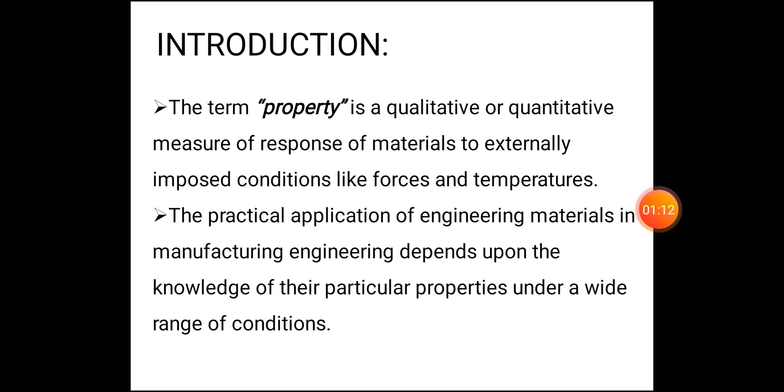The second point is that the practical application of engineering materials in manufacturing depends upon knowledge of their particular properties under a wide range of conditions. So before manufacturing any product, without knowing the property of materials, we can't use them. That is point number 2.

What are the classifications of material property? There are 4 classifications of material property: chemical property, physical property, mechanical property, and dimensional property.

Chemical property refers to the chemical reactions of material. Physical properties include density, Poisson ratio, conductivity, and so on. Mechanical properties include strength, toughness, stiffness, and so on. Dimensional property means the changes in size, shape, etc.

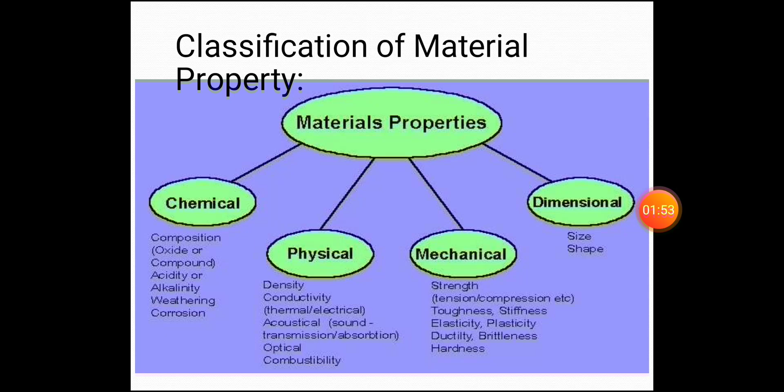Here we will discuss mechanical properties. What is meant by mechanical property? Mechanical property describes the behavior of material subjected to external force. When we apply some external force to the material, how it behaves is the mechanical property.

The mechanical property of materials provides the basis for predicting the behavior of materials under different load conditions and designing components out of them. Before designing any product, we apply different forces and check how the behavior of the material changes, and that gets notified.

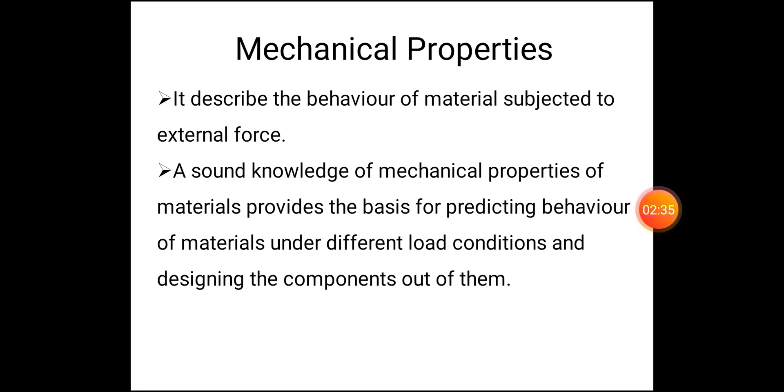Next, classification of material property: strength, elasticity, plasticity, ductility, malleability, stiffness, toughness, hardness and fatigue. These are the major classifications of the mechanical property of material.

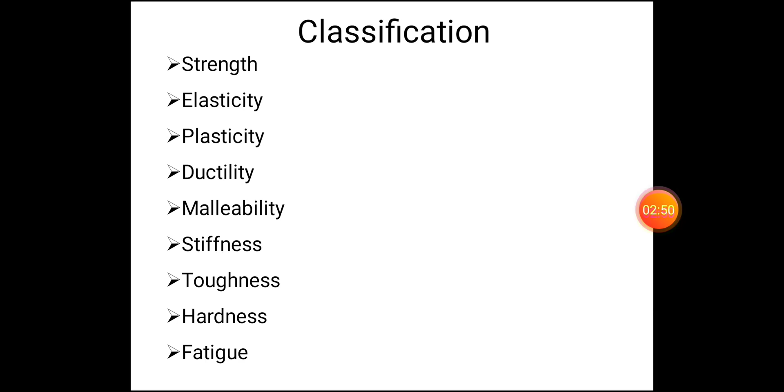First, strength. Strength is the ability of material to withstand load. For example, steel and RCC structures - steel structure and RCC structure. RCC is nothing but reinforced cement concrete.

See figure number 1: there are 2 humans pulling one material, it may be equal force or unequal force depending on the humans, so that material withstands the load of those humans. In the next figure, there is an animation of one man jumping on the structure or material, and the material should withstand the load. This is strength.

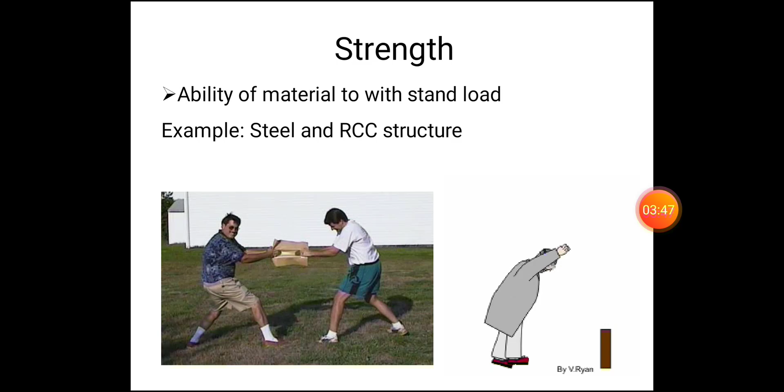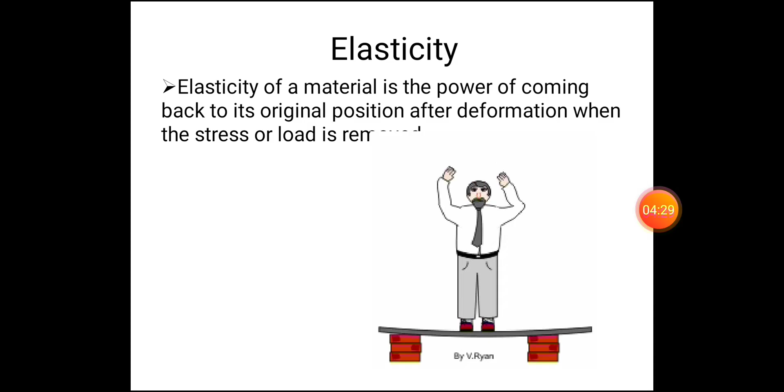Next, elasticity. Elasticity is the power of coming back to its original position after deforming when the stress or load is removed. Looking at the figure makes it easy to understand: there is a human jumping on the material, the material will deflect, and after the human comes up, the material returns to its original position. When he comes down again, it goes down. So after removal of the load, the material comes back to its original state. That is elasticity.

A better example for elasticity and plasticity: all of you know about a rubber band. When we apply or pull the rubber band with some particular force, and when we release the force or load, it comes back to its original position - this is elasticity. When you give continuous load, continuous pulling, after some particular load it will break and cannot come back to its original shape - this is known as plasticity, and the length of the rubber band also increases. This is plasticity, explained for better understanding purposes only.

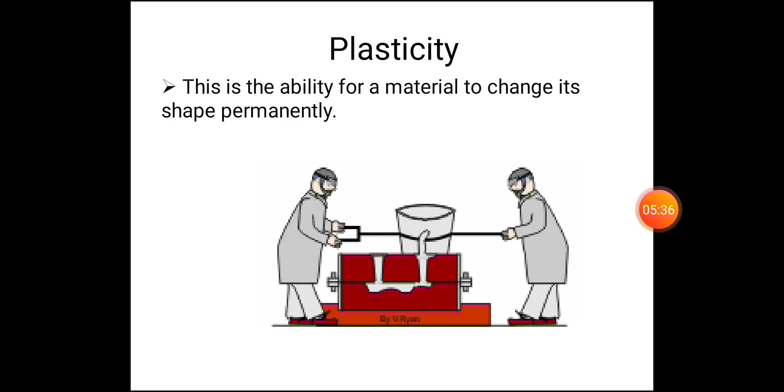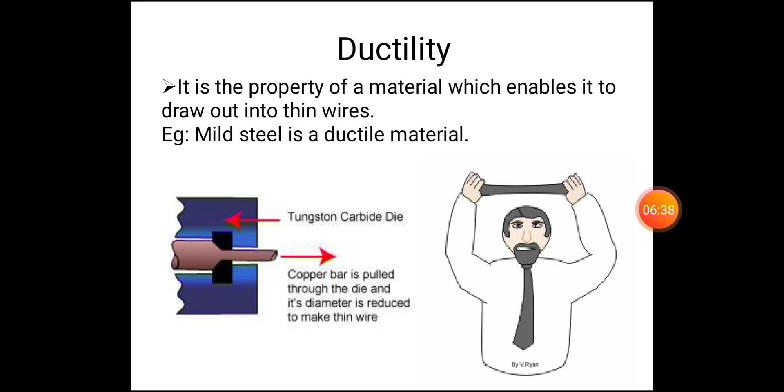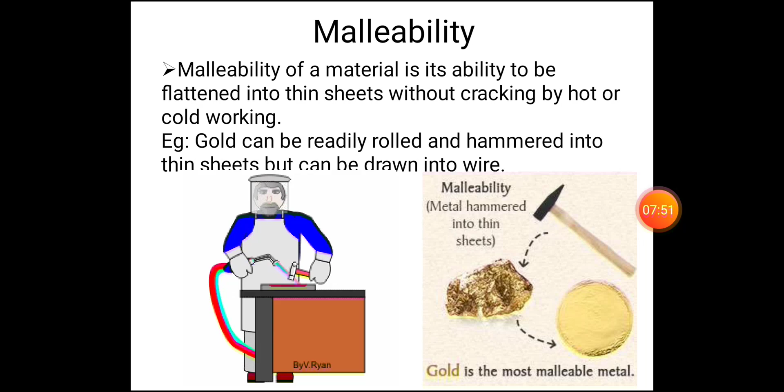Another best example, for easy understanding, is wheat atta used to make chapati. A round ball of wheat atta is rolled by a chapati making machine or roller, and it becomes like a thin sheet. I am saying this example just for understanding purposes of malleability.

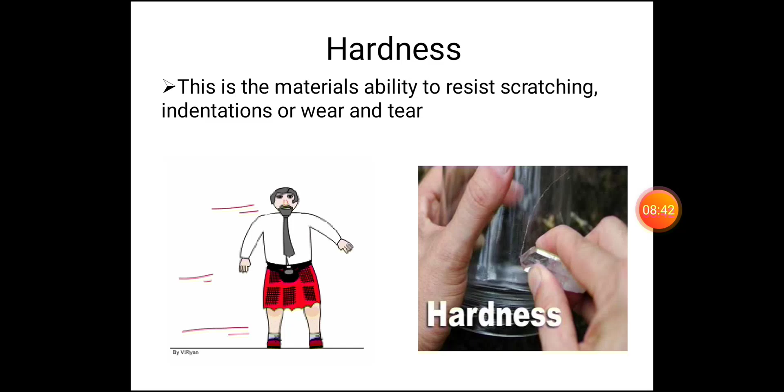For a better example, not an exact one but for understanding purposes: if you take a biscuit and apply load, it breaks. This is the best example for brittleness. Brittle material examples are glass and cast iron. If you drop glass from a particular height, it will break.

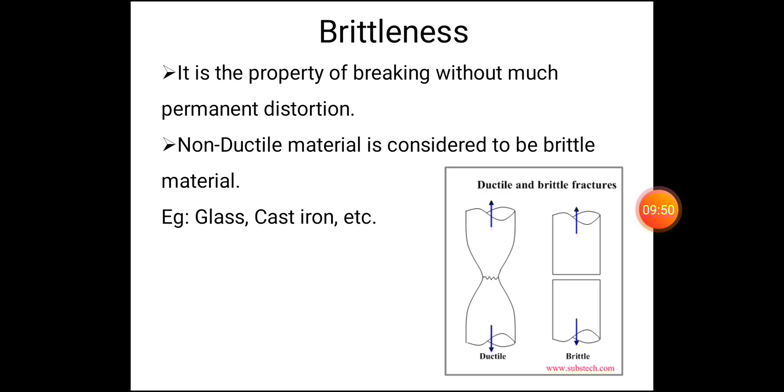Next, stiffness. It is the ability of a material to resist deformation. So when you apply load, it cannot change its size and shape; this is known as stiffness. For example, steel spring or spring steel.

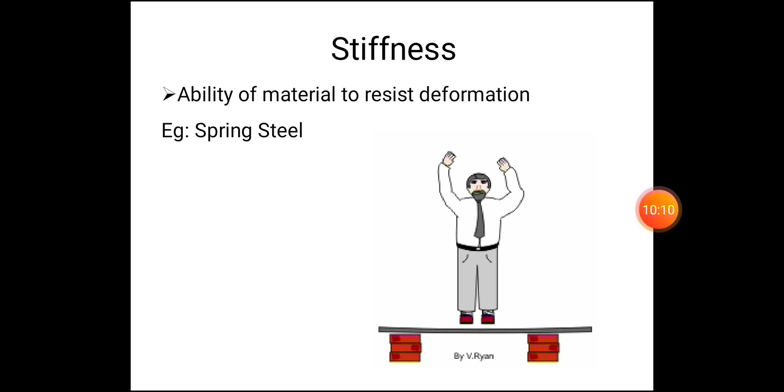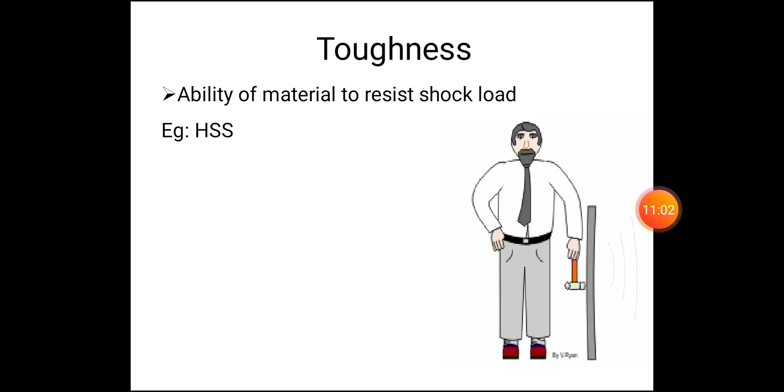For example, high speed steel. High speed steel is mostly used for making tools, for machine tool purposes. When we use the tool for machining, we give a depth of cut of 1mm, 2mm, 3mm. So toughness material is mainly used for manufacturing tools.

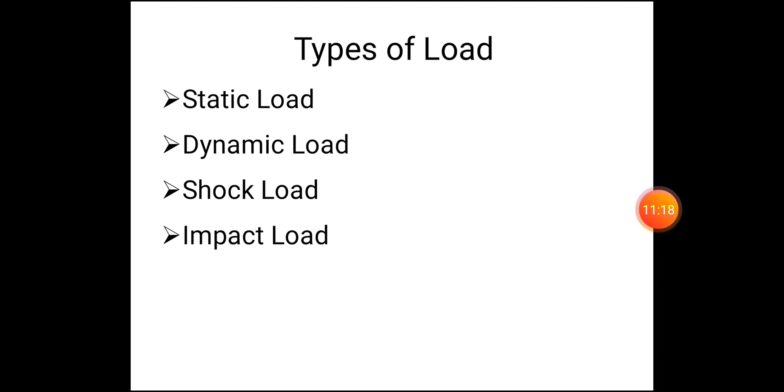So, types of load. There are 4 types of load based on mechanical property: static load, dynamic load, shock load, and impact load.

Static load: the load value does not change with respect to time, known as static load. For example, machine weight. When we keep a machine at a particular floor, there is no change in the machine's weight with respect to time. The machine weight will be a common example.

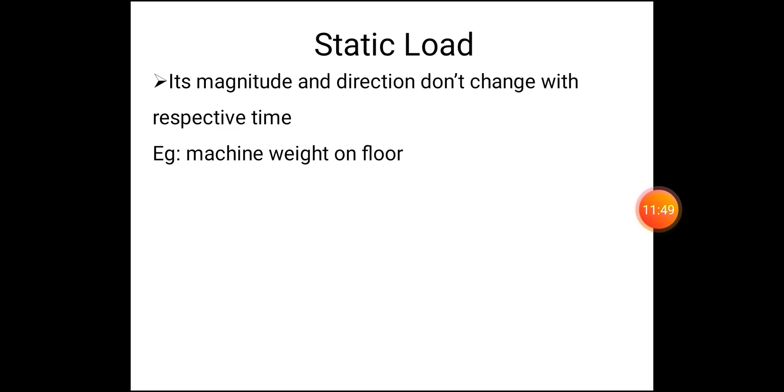Next, dynamic load. Dynamic load changes with respect to time. For example, cutting force, when we give depth of cut to the tool, the force may vary depending on the human being and time. The human may be tired, so it will give slow force, or the human may be very active, giving rapid and randomly high force.

This is not an exact example, I am saying it for understanding purpose. Two men are running on the ground, starting for 10 rounds. First 5 rounds he will go very fast. After that, for each round the speed will decrease randomly or with respect to time. This is another example for dynamic load.

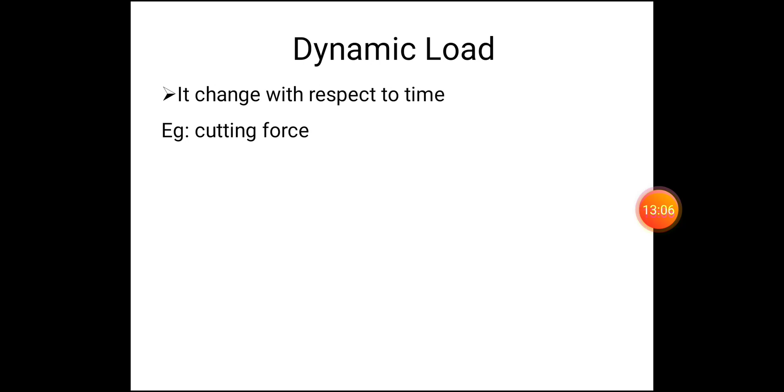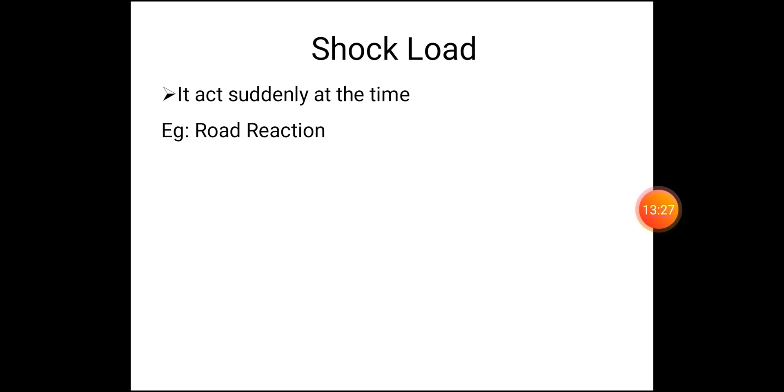Next, shock load. Shock load acts suddenly at a time. For a better example, during car driving, when we apply brake, there is a load and reaction between tire and road. This is a shock load during brake apply.

Next, impact load. Impact load is also one type of suddenly applied load, and it acts with some velocity. For example, a hammer blow is applied suddenly with some velocity. It is known as impact load.

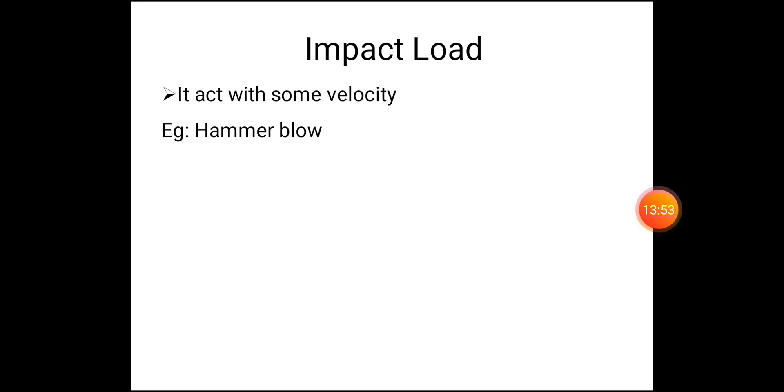Next, force. Force is nothing but F equals ma, the product of mass into acceleration. See the figure: there is a human foot that will hit the rubber ball. The rubber ball will move with some speed in a particular direction. The load or force is given by the foot, the rubber ball is the mass, and the mass of the ball moving with some velocity at a particular angle is the acceleration.

Another example: all of you know the cow. When we beat the cow, for example maybe a person X or Y beats the cow, what is the sound of the cow after being beaten? Ma, it gives a sound 'ma' - M-A. So the human beat is the force, the cow is the mass, and because of that beat, the cow moves some direction with some distance, which is the acceleration. This is for understanding purpose.

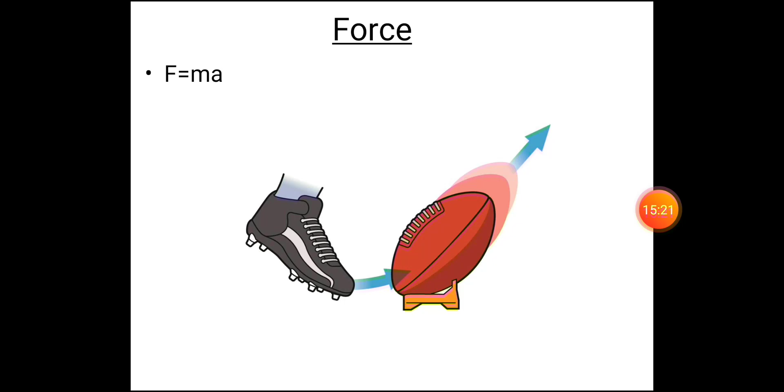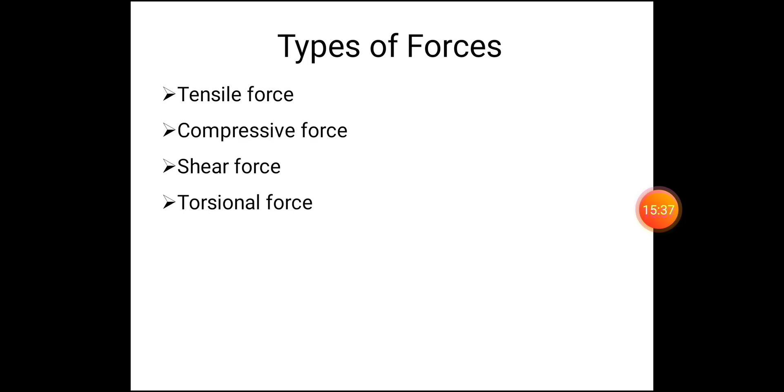Next, torsion force: a twisting force given at both ends of the material is known as torsion force. The best example is cloth washing - during cloth washing, finally to remove water from the cloth. In Tamil we can say 'murukrathu', that means 'thuni pulirathu'.

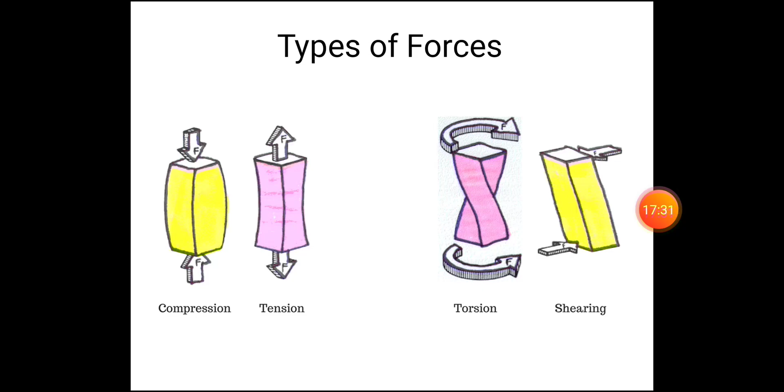Shear force is nothing but a side force - 2 equal and unequal side forces given at the end of the material is known as shearing force. Due to shearing force, the material comes to a particular angle, moving like a slope. In the same figure with a slight change: shear force has 2 equal side forces, and due to these, the material will break at the center point.

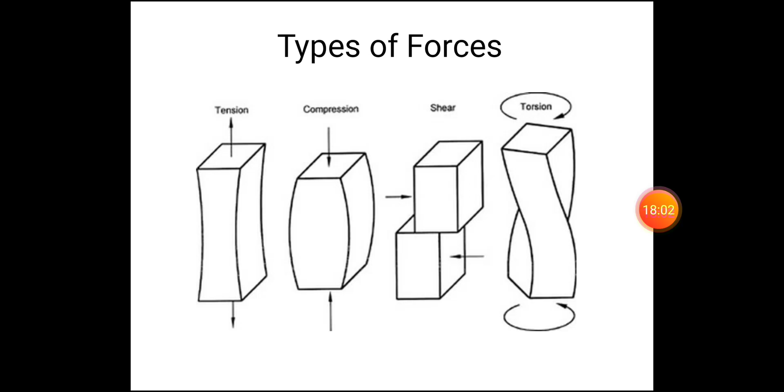For a better example, easy to understand: take a paper and give 2 forces to split up the paper - that is one type of shear force also. Another example for understanding: for a child's ear, we have to pull the child's ear - the ear is fixed, and at one end we are giving the side force.

So next, tensile test. Before going to tensile test, let's review what we've seen: what is meant by property, what are the classifications of mechanical property, what is meant by mechanical property, what are the types of load and forces based on mechanical property. So there is a material we don't know, how do we find material property? We don't know how to find material property.

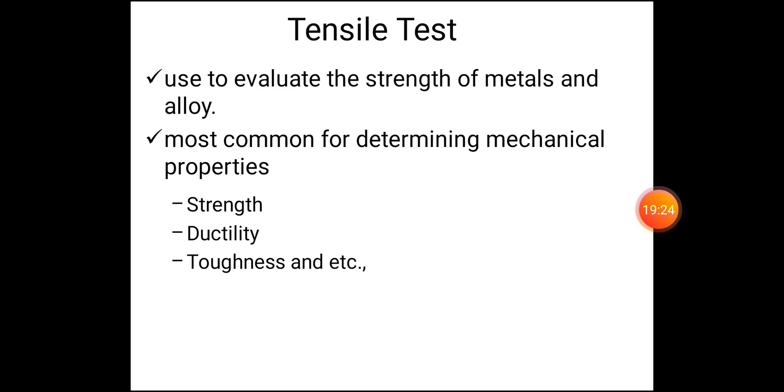So based on some test, we have to find the material properties. There are many tests available. Here we have to see only one test, that is the tensile test. Tensile test is mostly used to find out the strength of the material, and also used to find the toughness, hardness, and ductility of the material. So this is the main use of the tensile test.

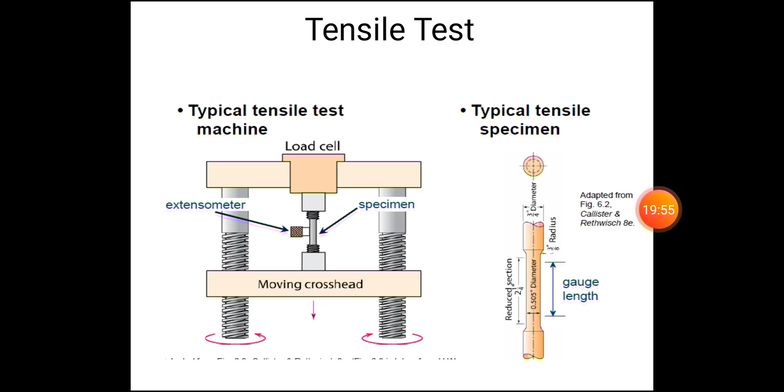See the figure. There is a moving crosshead, and in between there is a specimen and a load cell. One end of the specimen is fixed, and the other end is fixed with the crosshead. Then the moving crosshead comes down, so a load is given to the specimen. It comes down with some load, so the material will be stretched. Okay, see the figure.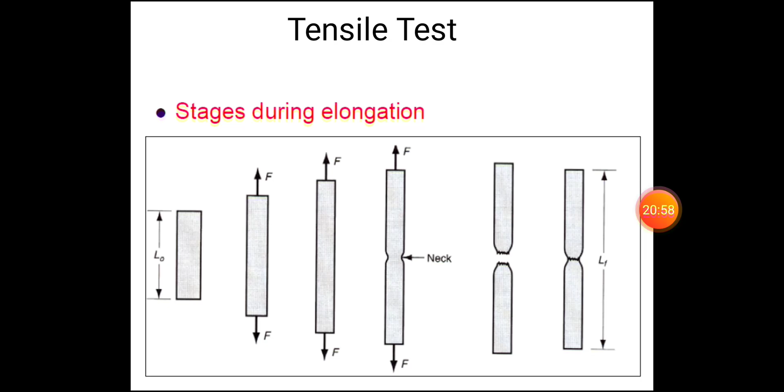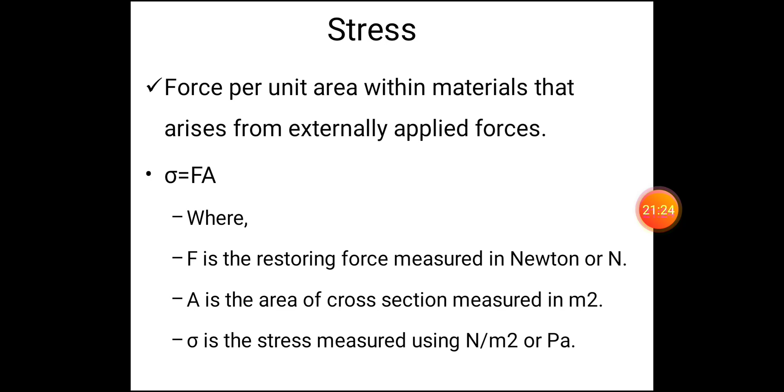By using the stress-strain curve. Before going to the stress-strain curve, I will explain what is meant by stress and what is meant by strain. Stress is nothing but, when we apply force to the material at a particular area, the reaction is the stress. There is a formula for stress: Sigma, the stress, is equal to F divided by A, where F is the applied force and A is the area over which the force is applied.

Strain is nothing but the ratio of the change in dimension of the object to the original dimension of the object, known as strain. So strain is used to measure the dimensional change of the material.

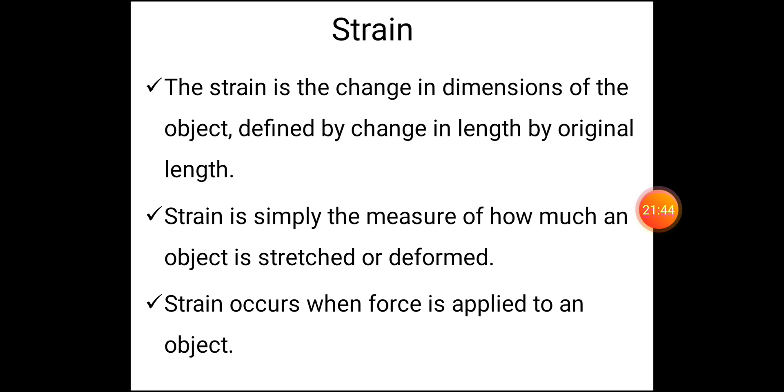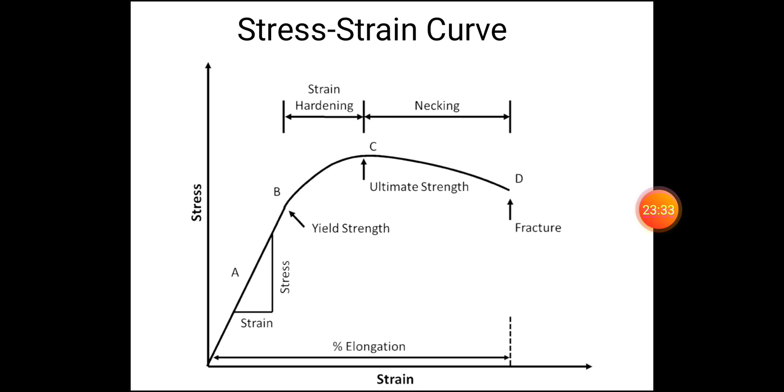So from this graph, for the same material: from origin to B it is in the elastic range, B to C is in the plastic range, C to D it is in neck formation, then the material breaks. Thank you.